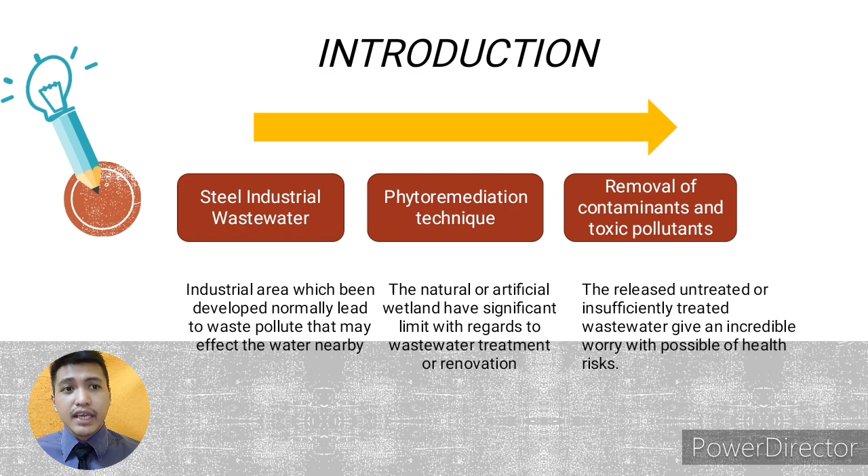Second is the phytoremediation technique, which I have used in my research article and also for my research. Natural or artificial wetlands have significant limits with regard to wastewater treatment or renovation, and also the removal of contaminants and toxic pollutants. The release of untreated and insufficiently treated wastewater gives an incredible worry with possible health risks.

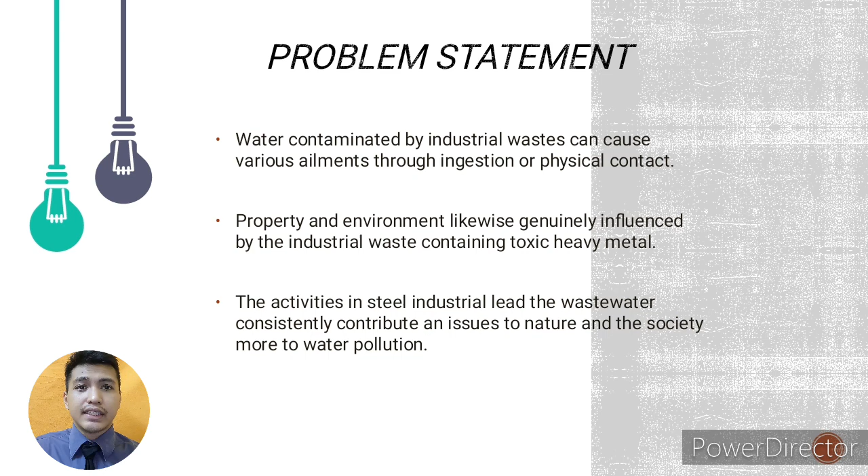Next, we will go to the problem statement. Water contaminated by industrial waste can cause various ailments through ingestion or physical contact. Property and the environment are likewise genuinely influenced by industrial waste containing toxic heavy metals. And next, activity in the steel industry leads wastewater to consistently contribute an issue to nature and also society, more to water pollution.

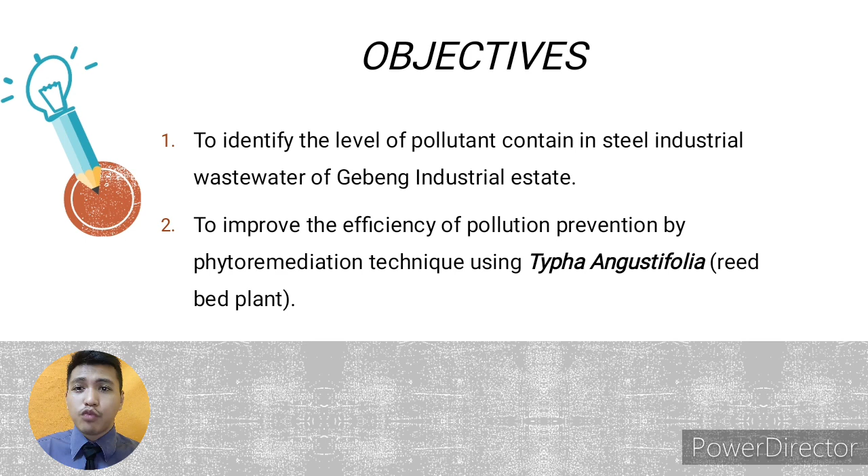The objective of my research is to identify the level of pollutants contained in steel industrial wastewater of Gebeng Industrial Estate, and also to improve the efficiency of pollution prevention by phytoremediation technique using Typha Angustifolia reed bed plant.

Okay, the scope of the study I chose is at Gebeng Industrial Estate, Kuantan, Pahang, at the steel industrial factory. It decides the diverse effluent quality from the steel industrial wastewater of Gebeng Industrial Estate and determines the quality of the sample after the phytoremediation procedure by utilizing Typha Angustifolia for several weeks.

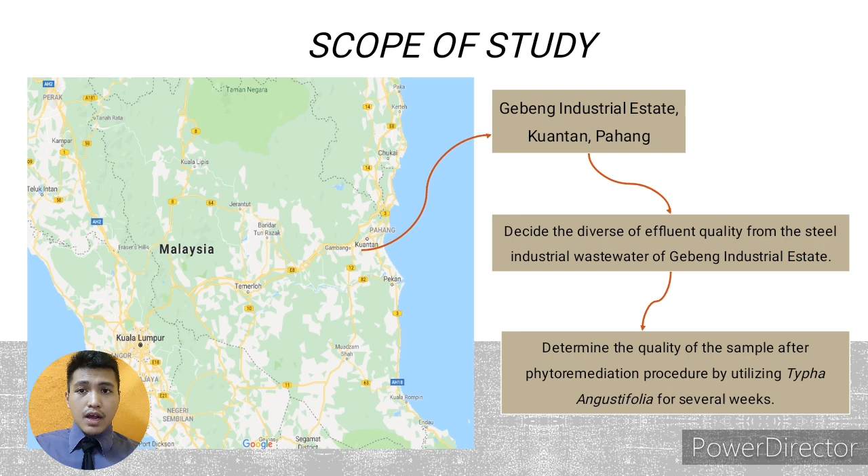I chose the literature review authored by Tilley, E. Ulrich, L. Luthi, C. Reymond, Ph. Zubrugg in 2014, where the research title is about a compendium of sanitation systems and technologies. The outcome shows that wastewater is a side effect of residential, business or horticultural activities which contain physical, chemical and natural poisons.

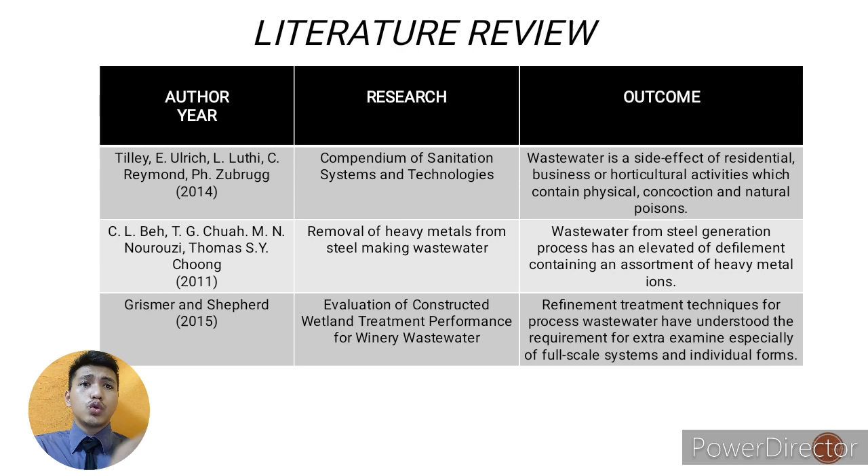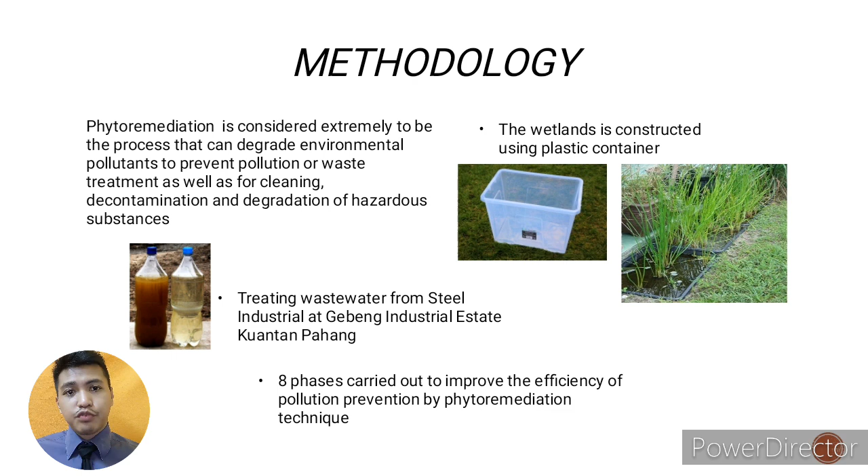Next, I will go to the methodology. Phytoremediation is considered to be the process that can degrade environmental pollutants to prevent pollution or for waste treatment, as well as for cleaning, decontamination and degradation of hazardous substances. For treating wastewater from the steel industry at Gebeng Industrial Estate, Kuantan, Pahang, the wetland is constructed using plastic containers. And there are 8 phases carried out to improve the efficiency of pollution prevention by phytoremediation technique.

Here is the research project that I have conducted to finish up the research on my title. Firstly is selecting the title and study area, collecting information, selecting material, then collection of wastewater and also collection of plants.

And then we go to the experimental setup, where I have set up 4 samples. The first sample is a control sample of 100% wastewater with no plant. The second sample is 100% wastewater plus 0% distilled water plus plant. The third sample is 75% wastewater plus 25% distilled water plus plant. And the fourth sample is 50% wastewater plus 50% distilled water plus plant.

And then it will proceed to experimental work, data collection, the removal efficiency calculation, and also the recommendation and conclusion.

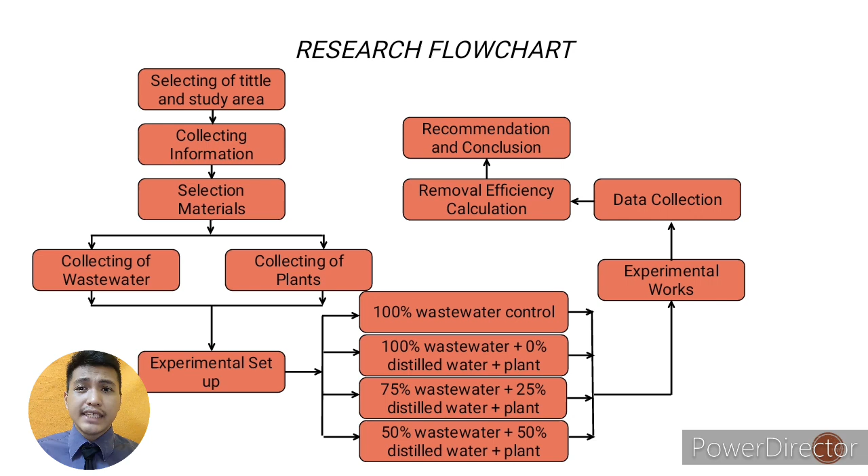Okay, for the sample collection, the wastewater is collected from the steel industry at Gebeng Industrial Estate. The wastewater will be tested at the environmental lab at University Malaysia Pahang. The wastewater will be collected as 50 liters for the 4 samples for experimental work.

The aquatic plant Typha Angustifolia will be collected, and I have collected it at a swamp at Kampung Pulau Pasir Badang, Kuantan. The plant will be collected with the root, as we know the root really functions to remove toxic contaminants and also heavy metals.

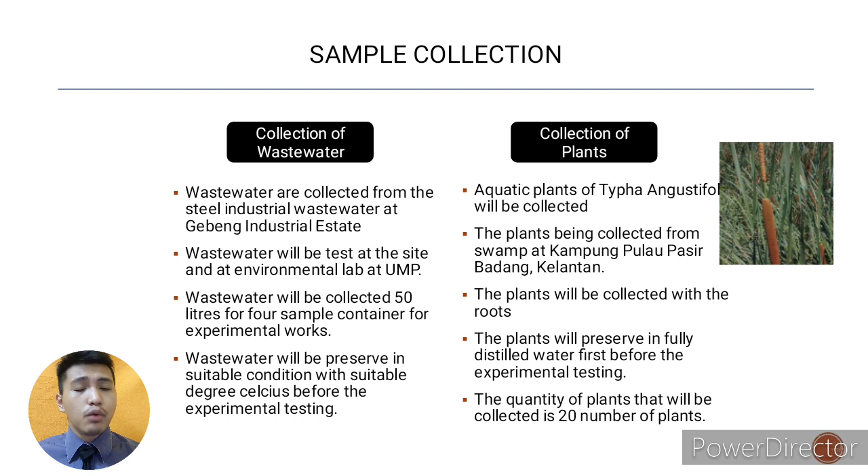The plant will be preserved in distilled water first before the experimental testing. The quantity of plants collected is 20, because in one sample we put about 6 plants.

We go also for the experimental setup, which is the setup of the experiment containing wastewater treatment. The model of wetland is set up in plastic containers for 4 different samples. The top cover of the container is covered with semi-transparent material to allow the sunlight and prevent the rainwater from changing the concentration of contaminant. The experiment also will be carried out for 3 weeks, from week 0, week 1 and week 2.

The sample have been conducted for 4 samples. Sample 1 is 100% wastewater as control. There is no plant on it. Sample 2 is 100% wastewater plus plant. Sample 3 is 75% wastewater plus 25% distilled water plus plant. And also sample 4, 50% wastewater, 50% distilled water and plant.

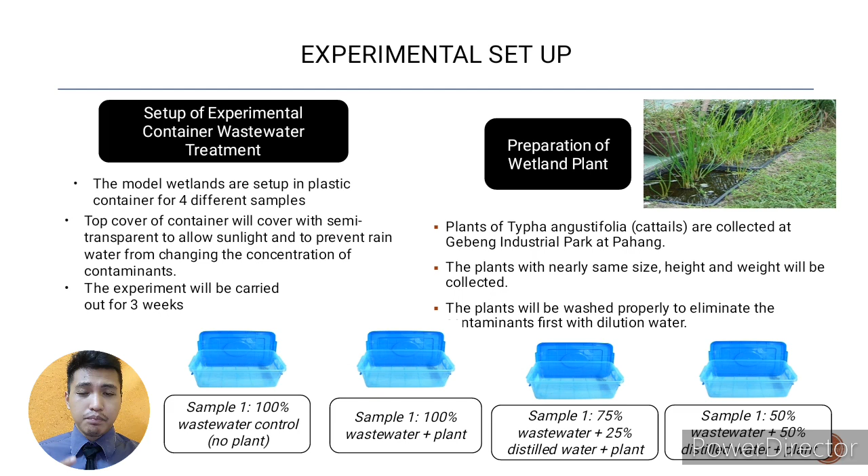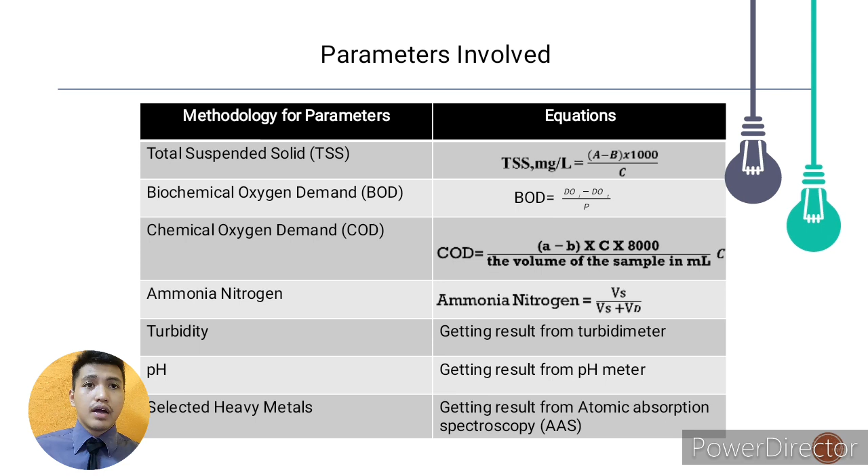Next we will go to parameters involved, such as total suspended solid TSS, biochemical oxygen demand BOD, chemical oxygen demand COD, turbidity, pH, ammonia nitrogen, and also the selected heavy metals such as cadmium, copper, and also iron. Next, the removal efficiency. This is because we have calculated the percentage removal of each of the parameters.

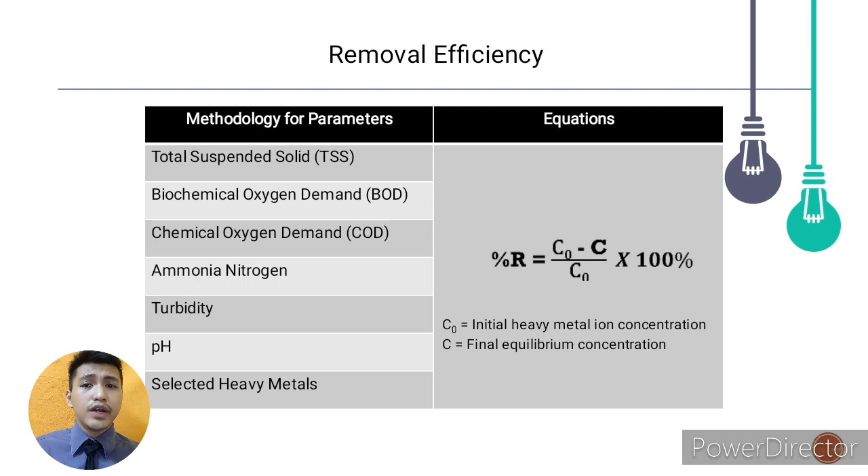For the result and discussion, first the turbidity. From week 0, the turbidity contained in the samples is nearly the same. But on week 1, there is a little reduction from the 100% control, 100% and 75%. And for week 2, we can see that the removal with the plant Typha Angustifolia is quite higher than without the plant of the phytoremediation technique.

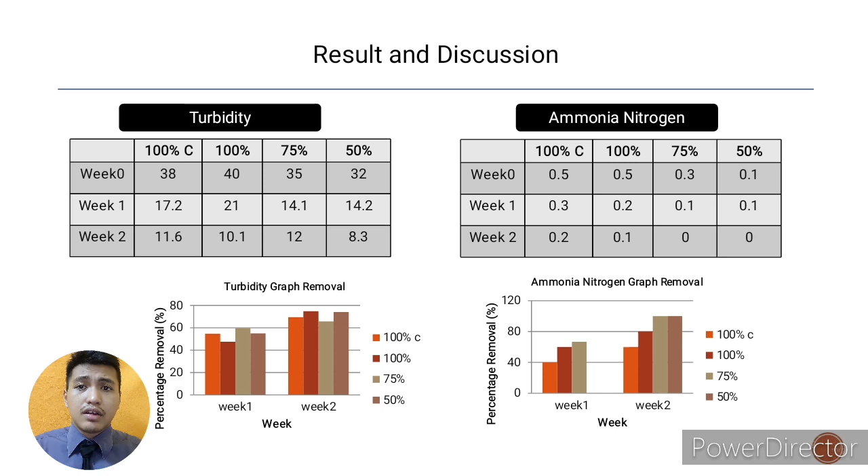As well as ammonia nitrogen, as we see on week 2, there is 100% removal of the ammonia nitrogen in the samples of 75% and 50% wastewater. Next we will go to pH value. As we can see on week 0, the results are nearly the same, and for week 2 the results are also nearly the same, except for the 100% wastewater. But all of the 4 samples seem to be neither acidic nor alkaline.

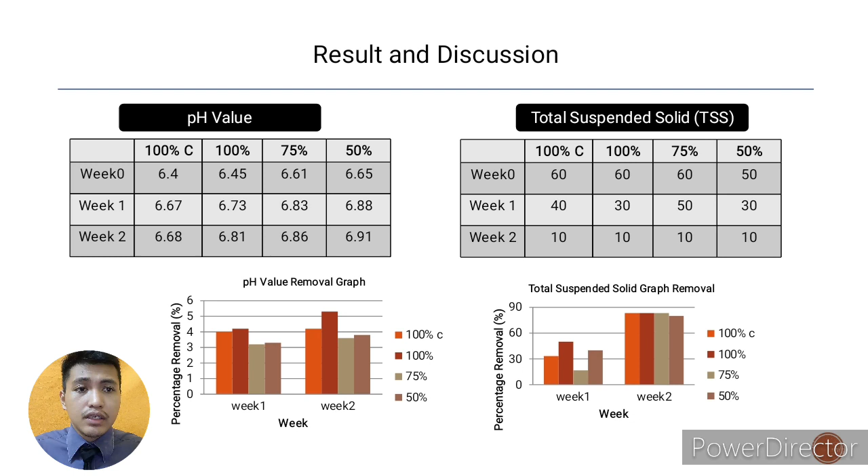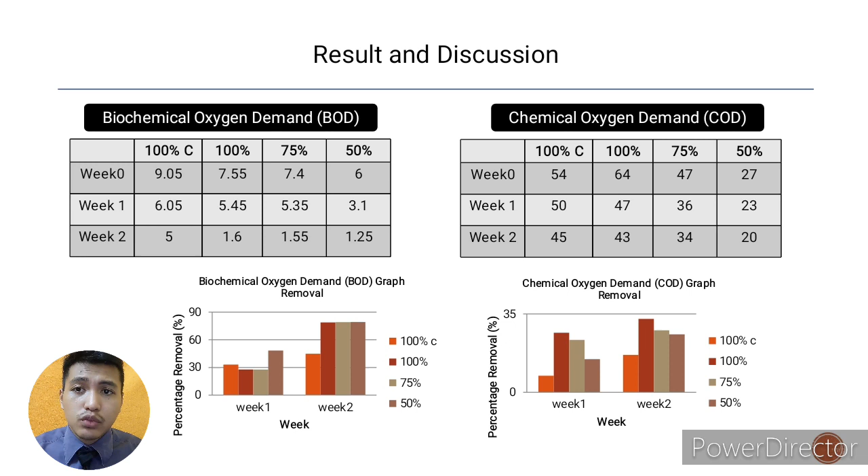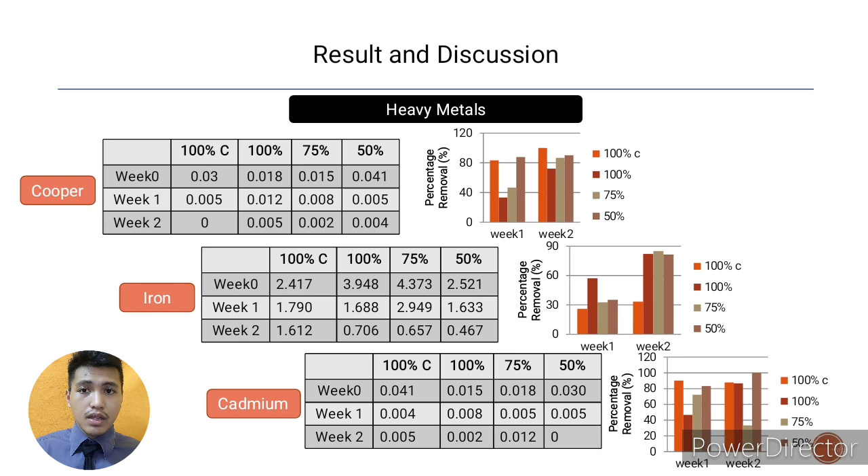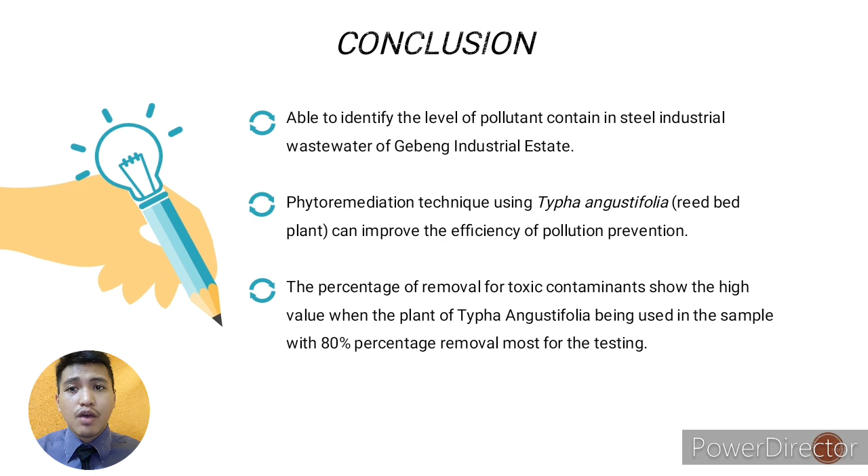Next, we will go to the conclusion. The conclusion of my research is I was able to identify the level of pollutants contained in steel industrial wastewater of Gebeng Industrial Estate, and it shows that the phytoremediation technique using the Typha Angustifolia reed bed plant can improve the efficiency of pollution prevention, since the percentage of removal is higher when we use the sample with Typha Angustifolia rather than the control sample.